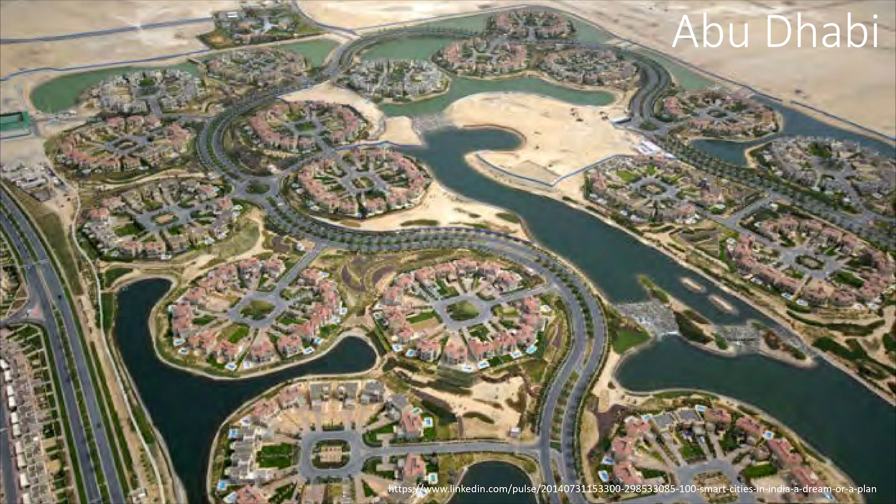Recently we use many keywords and terminologies, and it's very complicated sometimes, but I think of it like this. We used to use sustainability, green, low carbon, zero emission, security, or something like that - this is a vision for the city. So we call it eco city, low carbon city, or something like that. But if you look at the form of urban areas, it looks like a TOD, just as An Sensei mentioned.

Recently our government promotes the idea of compact plus network - a compact city. The difference with ancient cities is the technologies. Now we have many new technologies: smart grid, VR, AI, ICT. Based on those technologies we have MaaS, and also EV cars for transport. I'm in the transportation system field, so we have those transportation systems put into the form of the compact city - it becomes the smart city. So I understand it like this: we have a vision, a form, and these technologies.

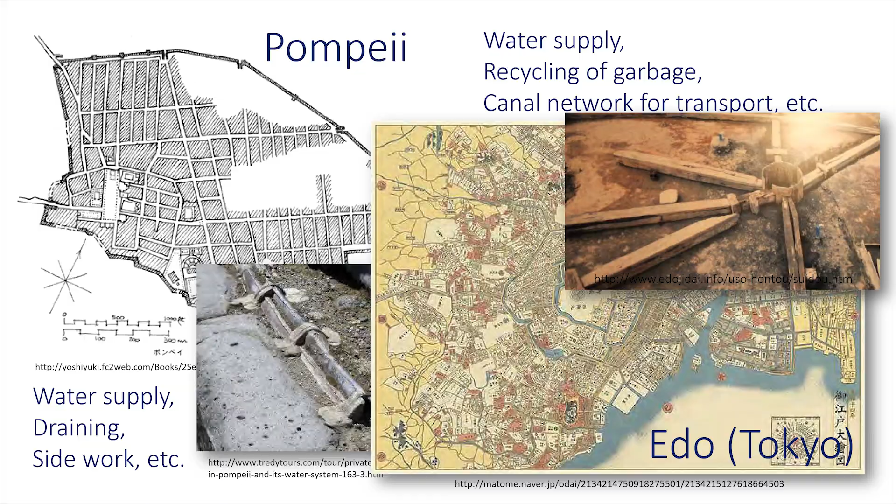Recently we also have to deal with COVID-19, as Sensei mentioned. And we have a global target. About TOD, as you already know, Peter Calthorpe in California proposed these ideas. Recently Robert Cervero, always talks about this - he sometimes comes to Thailand too.

Basically, based on rail transport near the railway station, Peter Calthorpe said from 400 meters to 800 meters radius we should have the areas - we can have a fancy life by walking.

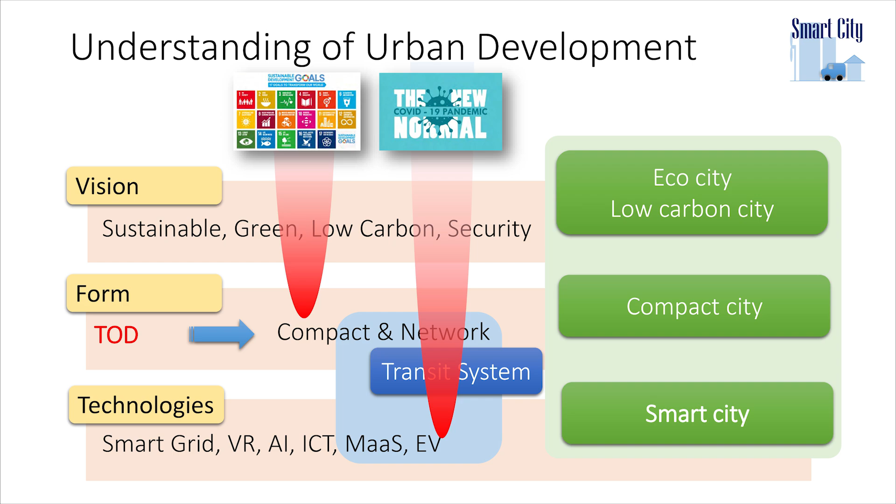In Japan, I very respect our senior, for example Mr. Ichizo Kobayashi, who brought this idea already in 1910. He started to develop the area together with a railway system. Now it's become the big railway company, the Hankyu, and he proposed many ideas. Some say he got this idea from the Garden City concept proposed by Howard.

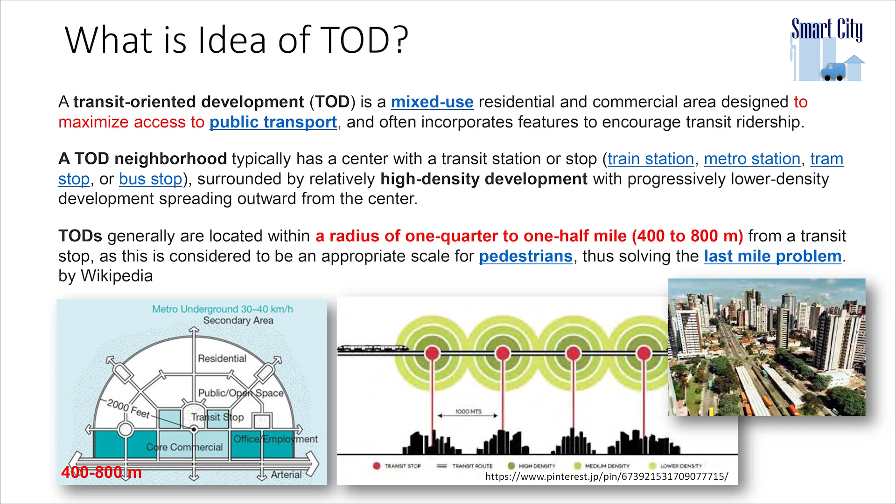From 1910 to 1960, more than 300 residential areas in Japan were developed based on this kind of area development together with the railway system - that is urban development in Japan. This is a very simple concept.

We have a CBD, and then the areas expand because many, many local people migrate from the countryside to Tokyo, Osaka, Nagoya a lot. So they need houses to live in, so we have to expand the city.

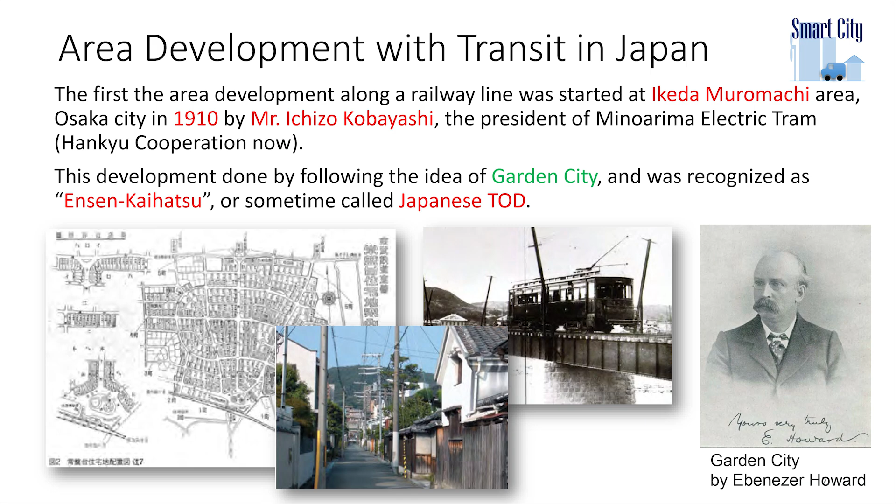Kanegai-sensei already explained what happened in Japan. Anyway, many railway companies developed along their own railway lines. The important point is that this development was made together with railway development. So by this, railway companies can get the benefit from the railway development.

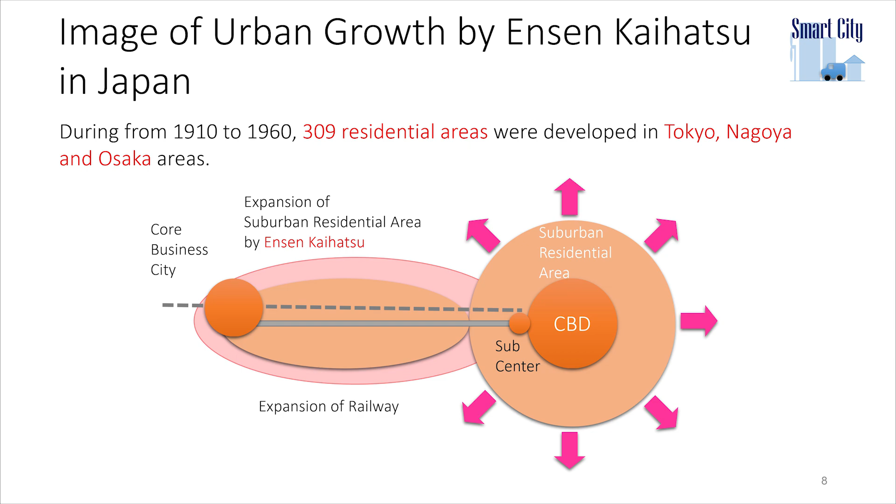If a railway company just develops the railway, they cannot get much profit from the ticket - not enough revenue. But their impact is huge. Once a railway starts to operate, that area develops a lot, so most of the benefit goes outside the railway business. So the point is how to internalize such external effects into the business.

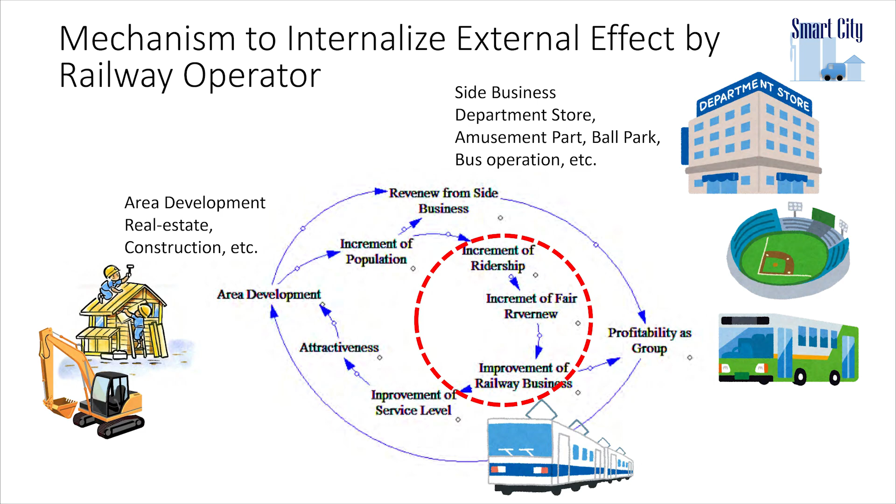Even JR East, which used to be the national railway and is now privatized, gets 30% of its revenue from non-railway business - they have hotels, some development in station areas, and get a lot of revenue. Look at the private railway companies too.

So they get almost 70% come from not railway business, other business.

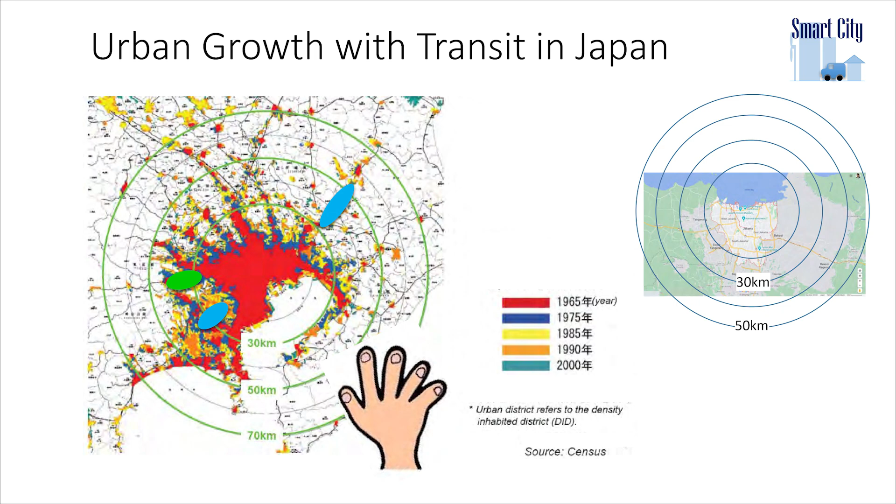That is very important. So look at the urban growth in Tokyo, for example. You can see it looks like a finger. Compare with Bangkok. In the case of Tokyo, almost new

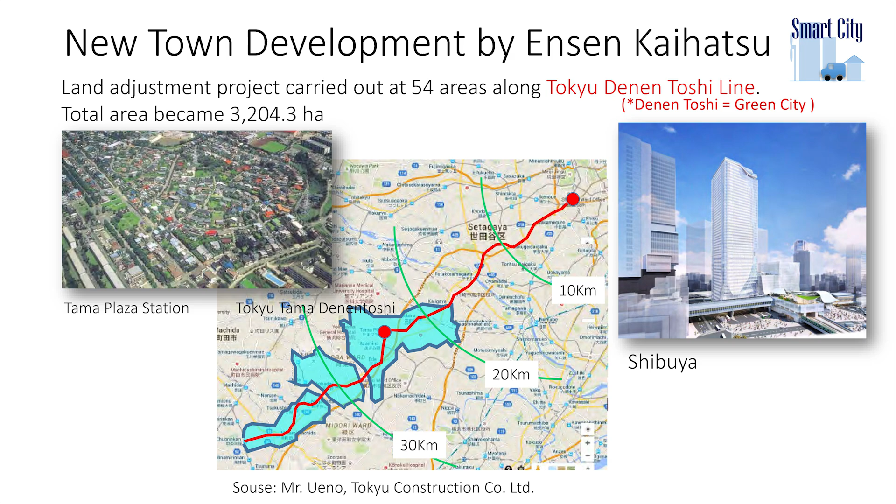urban area, and residential area, over the 30-kilometer diameter up to around 50-kilometer diameter. Compare with Thailand, now we're discussing MAP2, but most of the urban railway line within the 20-kilometer diameter, only the center part of Tokyo. It looks like near the Yamanote line, right? So in Japan, we talk about over the 30 kilometer up to the 50 kilometer.

So look at, there are many private railway companies in Japan. Each line operated by a different private firm, and then they get profit by this. So let me introduce some examples.

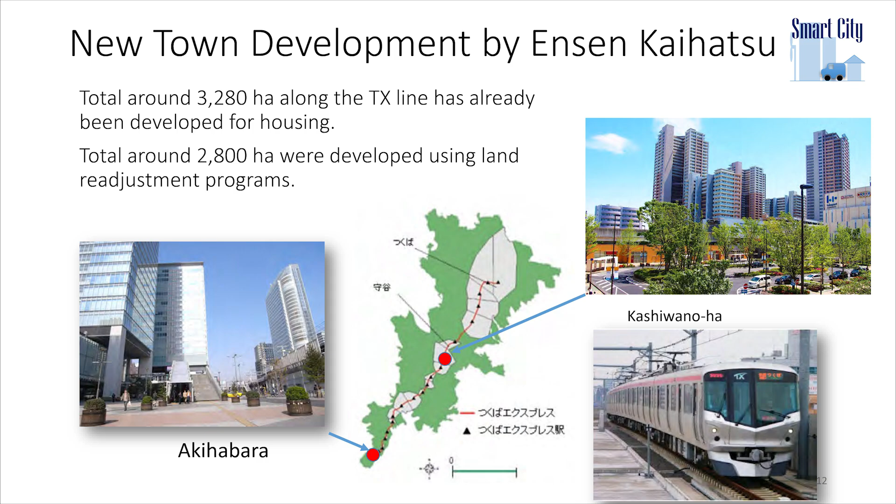If you have experience visiting Tokyo, maybe you take the subway. That is only within the CBD area. The outside is operated by private railway companies. For example, in Tokyo, the line bound from Shibuya, that you like, to the Hakone area, right? So maybe you have experienced this sometime.

And when they start to build a Tokyu railway line, there is no residential area along the railway. So actually, they have the 54 land readjustment project. Actually, this system is already established in Thailand also, right?

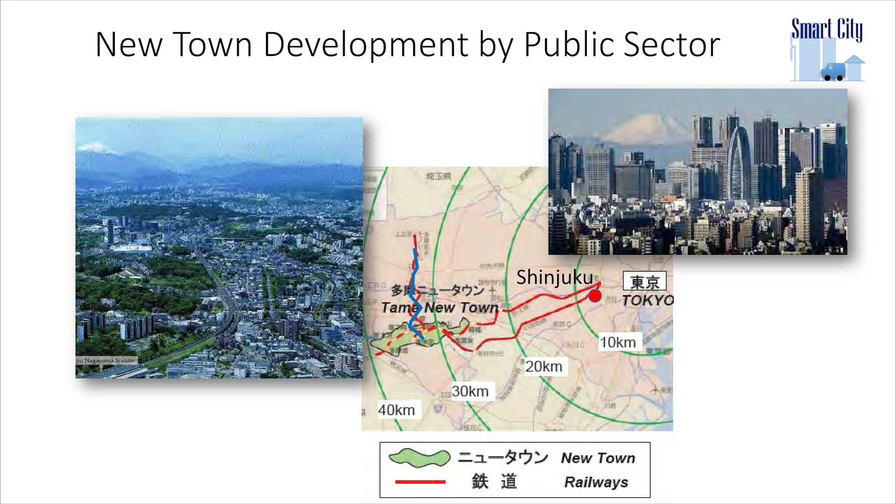So Tokyu cannot buy all the land. So they buy the land a little bit, and they established the 54 land readjustment union. So Tokyu becomes one of the members of the union. So they can lead other landowners, then they start to develop.

And when they start to develop, they didn't decide where the railway line is. So after they start to develop the area, they decided where is better for the railway line. More than 3,000 hectares was developed this way. So now here is a very famous residential area, and very expensive.

And this is the newest one, from Akihabara. You also know very well, Akihabara to Tsukuba. This area also applied the land readjustment project, and 2,800 hectares was developed by this.

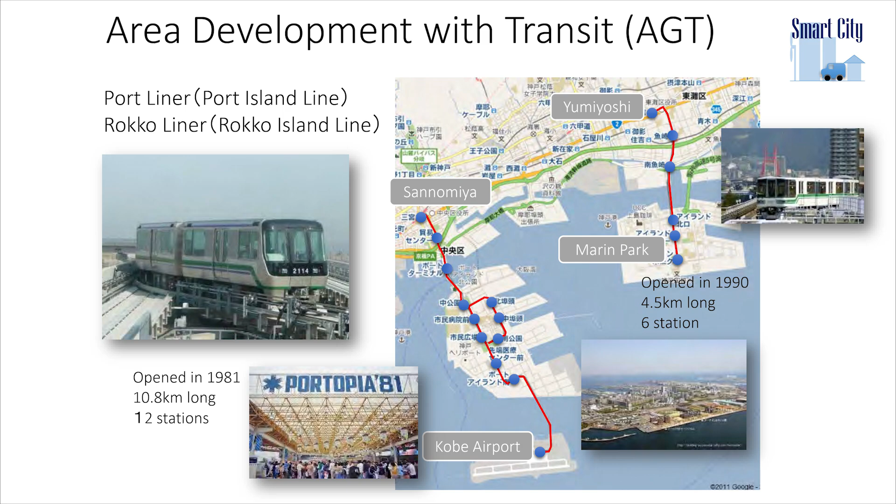So this is the newest one, but still we have this system, and of course by the train fare, we cannot return all the deficit, so we have to get some kind of benefit from area development for the railway business.

But I would like to tell you, sometimes government also developed the area, not only railway companies. In the case of Tama New Town and Chiba New Town, they were developed by government. But in this case, private railway companies cannot internalize the external effect.

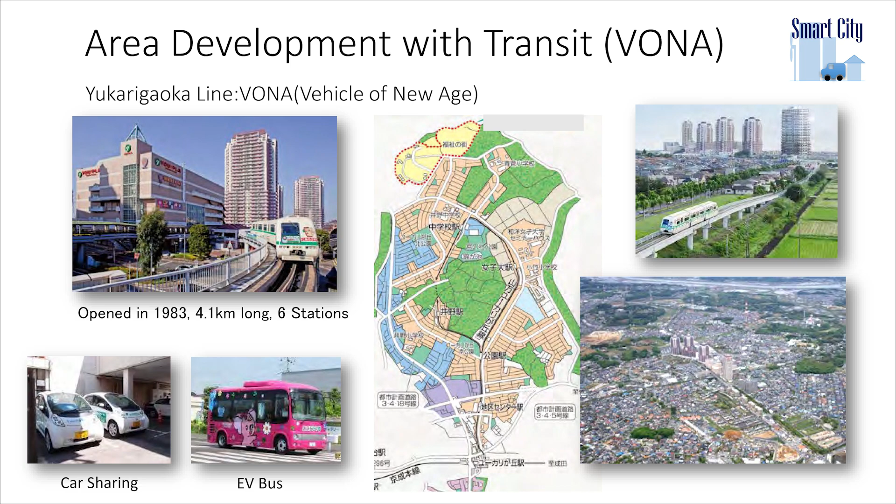So for that reason, our government prepares some subsidies. So if a private railway company comes and operates railways, the government shares some cost for them. For example, 50% of the construction cost was covered by government.

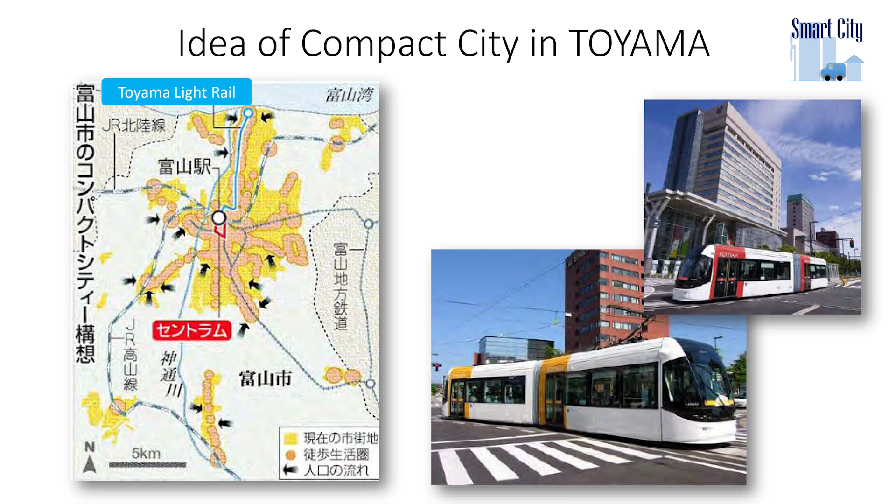And also we have a very small size of this kind of development. If you have Kobe, you can see there is a man-made island. This is the reclaimed area. They are very smart, Kobe city is very smart. They get soil from the mountain, and they develop that area and bring the soil by like a tube, and they have this island. Now they have an airport also.

And for these islands, they have guideway transit systems like this. Or some private developers also develop by themselves.

This is close to Narita airport, named Yukarigaoka. The company named Yamaman developed this small transit system by themselves. They pay for everything, they didn't get any fund from government. They operate by themselves and develop these areas.

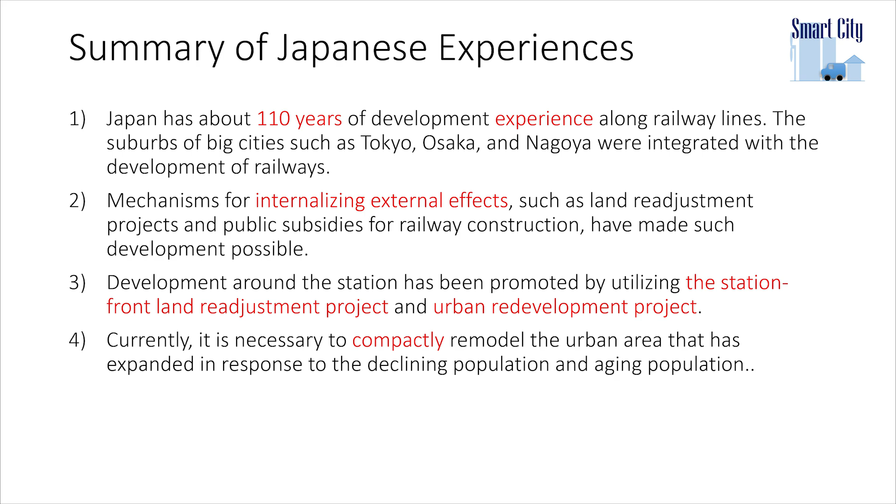And so now, you know that in Japan, the population is decreasing a lot. Some statistics say that by year 2050, our population will become half. So that is a big problem for us. So how to make the city area compact is the main issue.

So some cities already started, like Toyama, they renewed the tram to the new type of LRV. Then they ask people to stay near the tram line. So make the city compact. Government provided some support.

Oh, I forgot. So, yeah, anyway, I don't have much time.

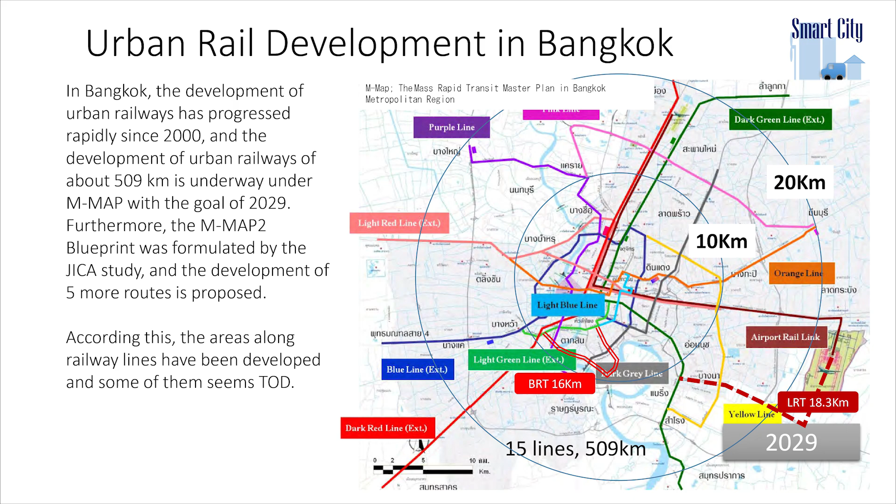We have a long history, and luckily, when we started to develop the area, we could introduce the railway system simultaneously with area development. So we don't have an auto-dependent city, but mainly a rail-dependent city for Japanese people. The station is very important for Japanese people. The station is the center of our life.

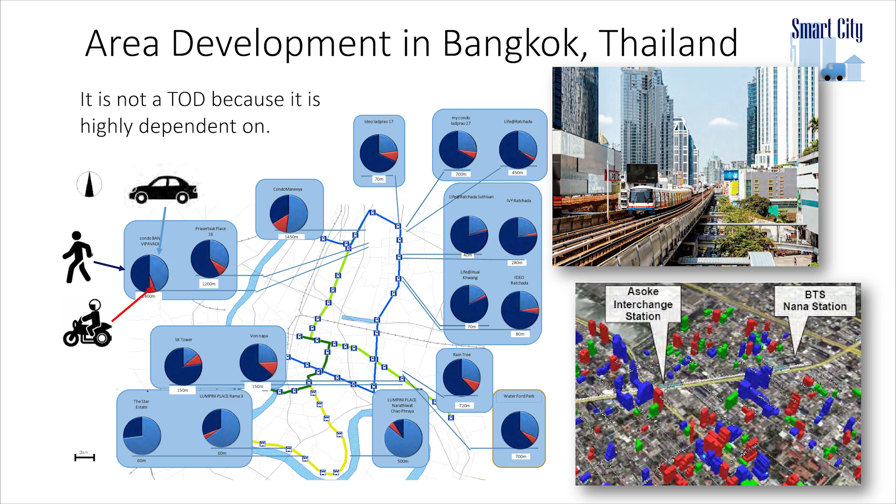Look at Bangkok. This is an M map. From it, by 2029, you will have a 509 kilometer network with 15 lines. But you should realize how many stations you will have once all railway lines open. By year 2000, you had zero railway stations for urban railway in Bangkok. But after completing the whole network, you will have 330 stations in Bangkok. You should realize this problem.

So we think you can develop the area together with the railway. Many people say Bangkok is a good example of TOD. I always say no, because I studied with Professor Fumihiko Nakamura about this.

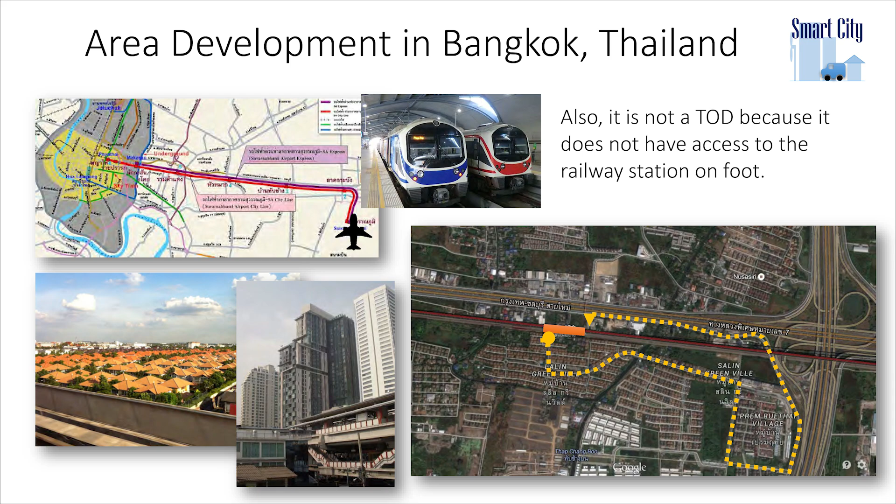We sent students to count how many people come out from condominiums near the railway stations. Even in condominiums, whatever room, whatever condominium, there are many parking spaces. During the daytime they're empty. So many people, even just 5 minutes from the railway station, everybody drives the car. That's a problem.

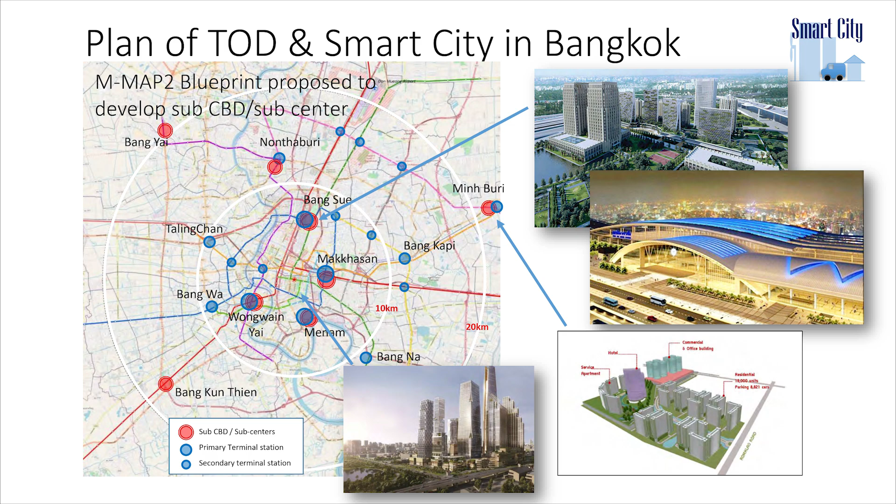Actually, we also have a condominium near here, just 5 minutes from Lat Phrao station. But my wife drives the car every day. I said, let's take the railway, the subway, MRT. But my wife said, why? So it's a very difficult problem.

Please realize, even though there are many condominiums near the railway station inside Bangkok, the problem is that people don't rely on the railway. That's very, very strange.

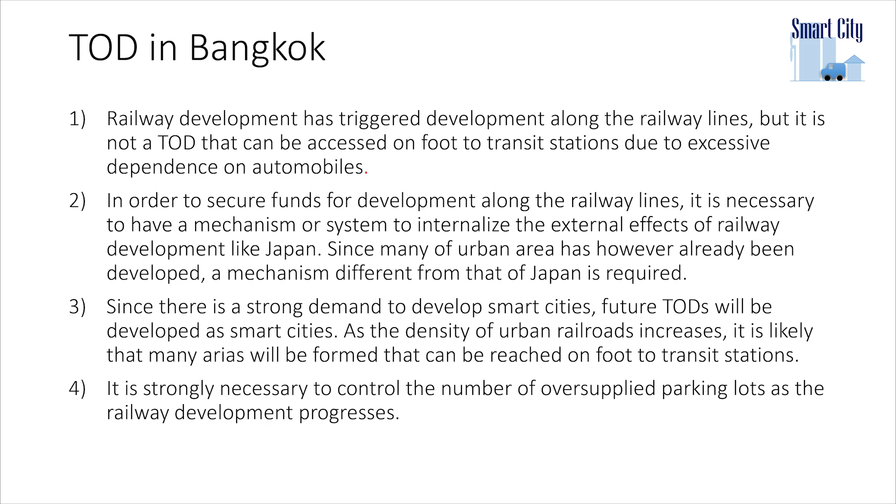One time, my friend, I won't mention the name, bought a condominium near a railway station. I asked him, why did you buy the condominium? Do you use the train? No, I just use the parking, because there's no parking near the station. He had a flat house, so he drives the car to the station, parks, and comes to downtown.

Also, the problem is, as Ansen mentioned, accessibility. That is a big problem. It's one example near the airport, along the airport rail link. The houses here have no access to the railway station. We cannot believe this for Japanese people. For Japanese, in front of the railway station is the most valuable land. But in Thailand, you cannot access it, so these people have to go around to come to the railway station.

It's very strange. If you look at the scene from the railway, there are many houses, so foreign people misunderstand - they think there is a railway, so people buy houses near it. No, actually they use the highway, relying on the highway, not the railway.

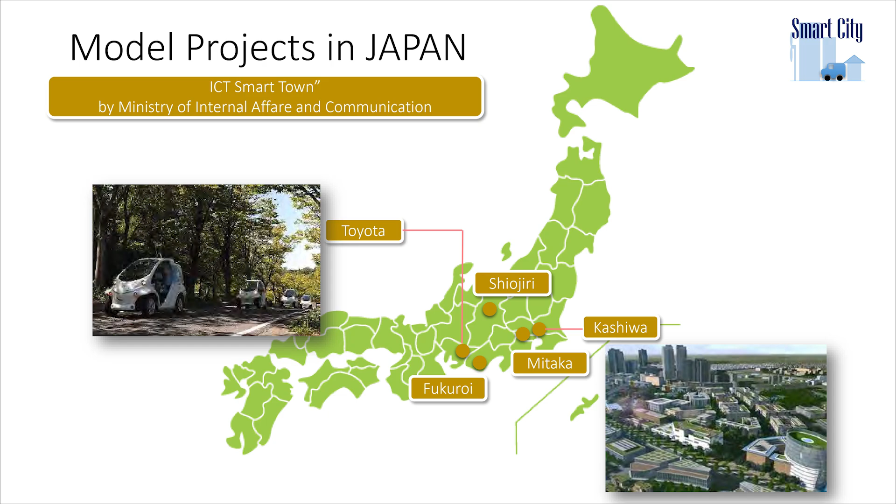I said in Japan, we developed the area together with the railway. But not only Bangkok - also maybe Jakarta, Manila, and Hanoi, Ho Chi Minh - those cities already developed based on automobiles. So there's no going back much like Japan. So how do we internalize the external effect?

And in Thailand, another problem is that under your law, the railway company cannot develop the area. They have no right to develop. That is a big problem.

So anyway, under the M-MAP2, that is the revision of the master plan for the urban railway system. We propose many ideas. You have to think about where the sub-centers or transition terminals should be, and then consider how to develop that area. This is very important.

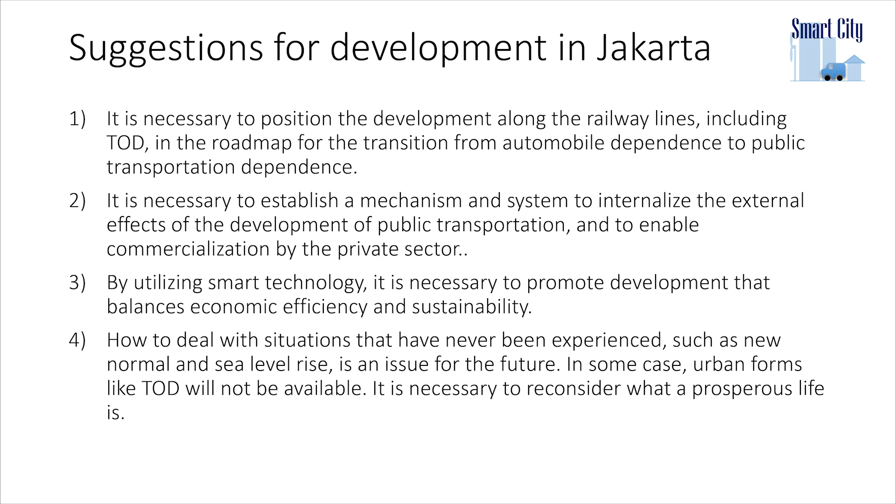I know many staff at MRT, for example, study like this. They would like to do that. I know there are many reports, I also collect many reports. They propose, but I don't know. They said that when they submit to the board meeting or legal office, it's always rejected. So they cannot solve this problem. But now you have to consider it.

Anyway, depending on automobiles is a problem. So now the time has come to turn Bangkok from an auto-dependent city to a public transport-dependent city. So how to do that? That's the most difficult part, because you cannot internalize the external effect, and also there's the regulation. So it's very difficult to do that, but now the time has come to consider this.

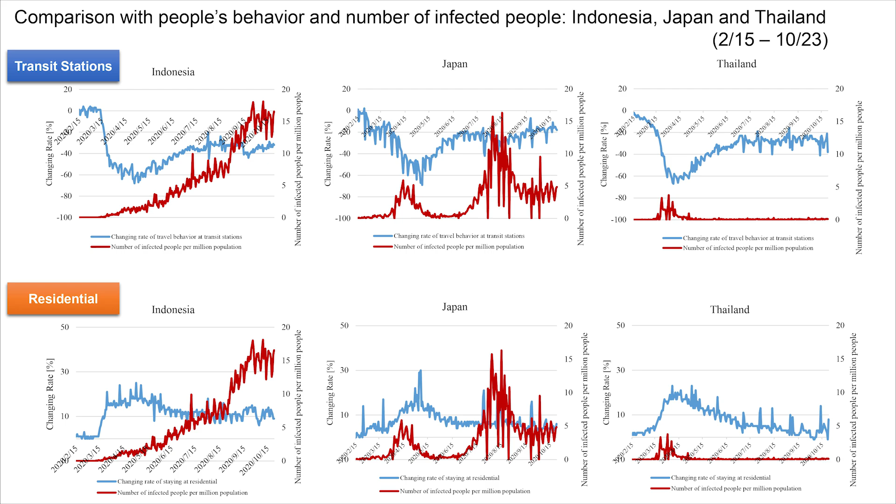One of the issues is parking. Too many parkings in Bangkok. We have a regulation in Japan also, and compared with Bangkok and Tokyo, the regulation in Bangkok is 2 times that of Tokyo. So if a condominium provides a lot of parking, and each commercial building or condominium provides so many parkings, how can you stop people from driving cars? Very difficult, right?

In Tokyo now, many developers ask local government to reduce the parking regulation, because maybe 30-40% of the parking provided under the regulation goes unused. So developers would like to reduce it. In Tokyo, most people use public transport, so they will not drive the car, so there's no necessity to provide the parking.

Maybe it's the time for Bangkok to discuss about the parking, how to provide the parking.

And the smart city, we have many ideas, but actually we don't have a new development like Iskandar or Dubai. We basically discuss about retrofit, how to transform the existing city into a smart city. It's not so easy, actually, because the question is: who will pay the cost to transform our city to the smart city? We need a big budget, and we don't know how to pay for that budget.

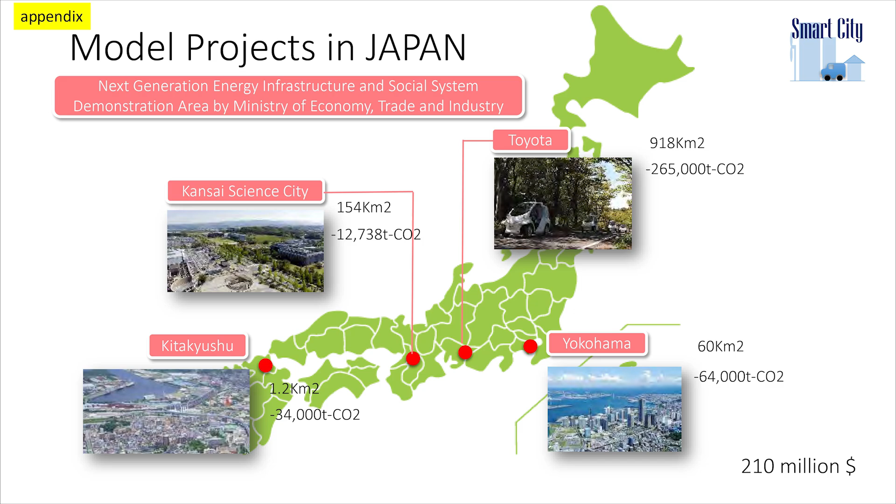And another problem, as Sensei also mentioned, is the 15-minute city concept. We already discussed this in the case of Chiba City, which my staff calculated. Of course, we just consider the compact city plus network. In Chiba City there is an urban monorail, so along the monorail we can make the city compact.

But the problem is that if you ask people living near the monorail to move their house, so who will pay for that?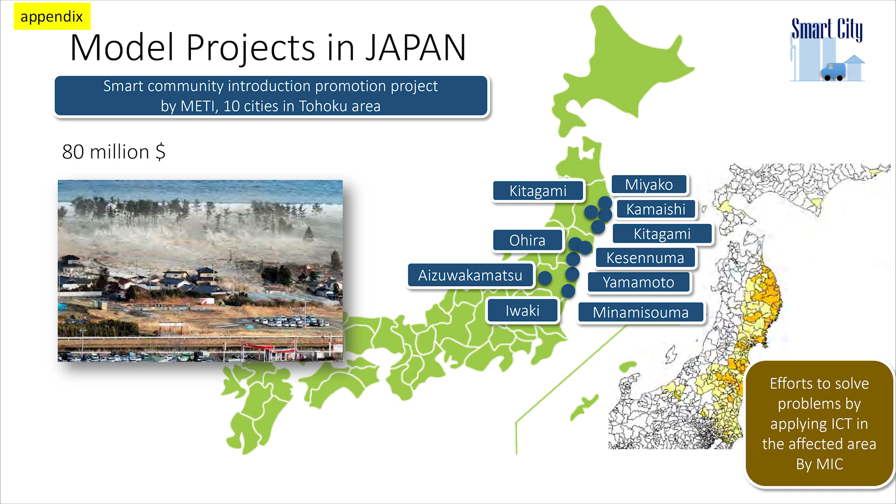So another idea is the 15-minute city, or X-minute city. I don't know if 15 is okay, or 10 minutes, or 20 minutes, but anyway the 15-minute city idea is also very important. This will help a little bit. According to our calculation, I think the 15-minute city is much more applicable for our society.

And our big question at the moment is: of course compact city is okay if it becomes compact, it's very effective, no emissions, no energy consumption. Okay, but during the transition to the compact city, how do we do it?

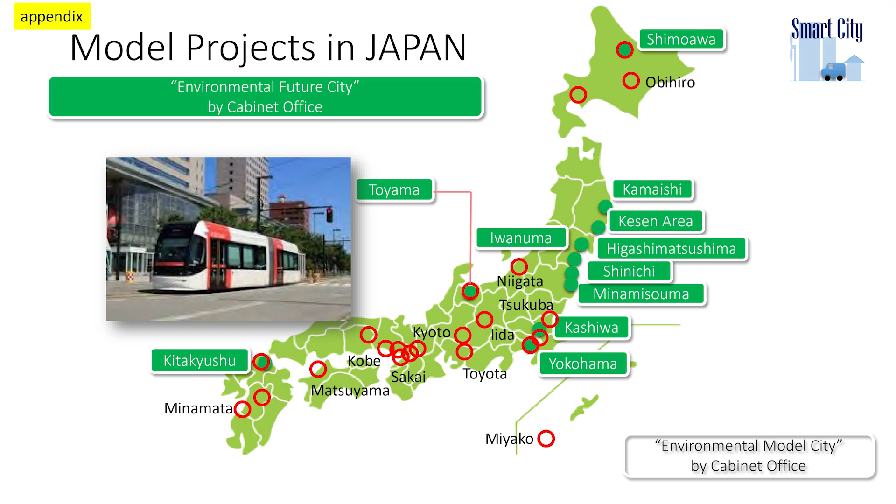We are very worried about this. If we hurry to make it compact, we need a huge budget. If we wait to become compact naturally, maybe it takes a long time. How do we manage during that time? Because we have to demolish some public facilities, schools, hospitals, to make it compact. We need the money, even for demolishing, right?

But still people stay, the densities become very low, so it's not effective for all facilities. That's a problem. So now our group is discussing about this.

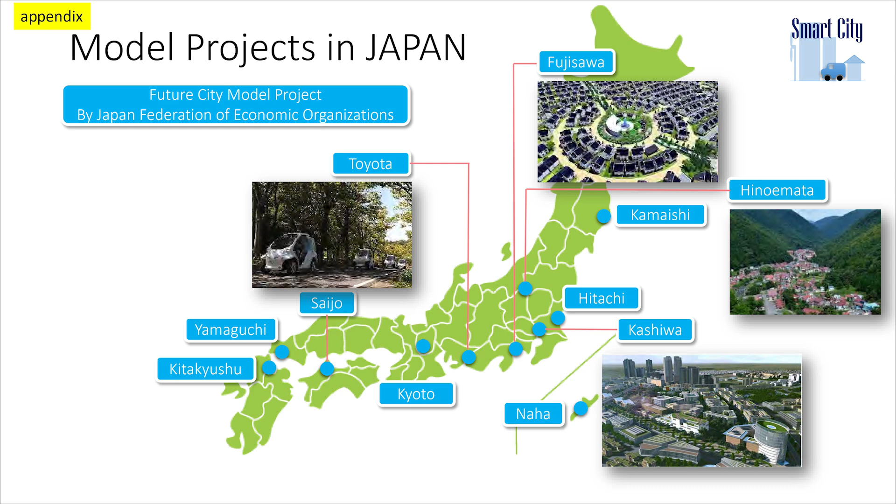So as a suggestion, I don't know if it's a suggestion or not, but let me read it. It is necessary to position development along the railway lines, including TOD, in the roadmap for the transition from automobile-dependent to public-transport-dependent. Second, it is necessary to establish mechanisms and systems to internalize the external effects of public transportation development and to enable commercialization by the private sector. That's important. Third, by utilizing smart technology, it is necessary to promote development that balances economic efficiency and sustainability.

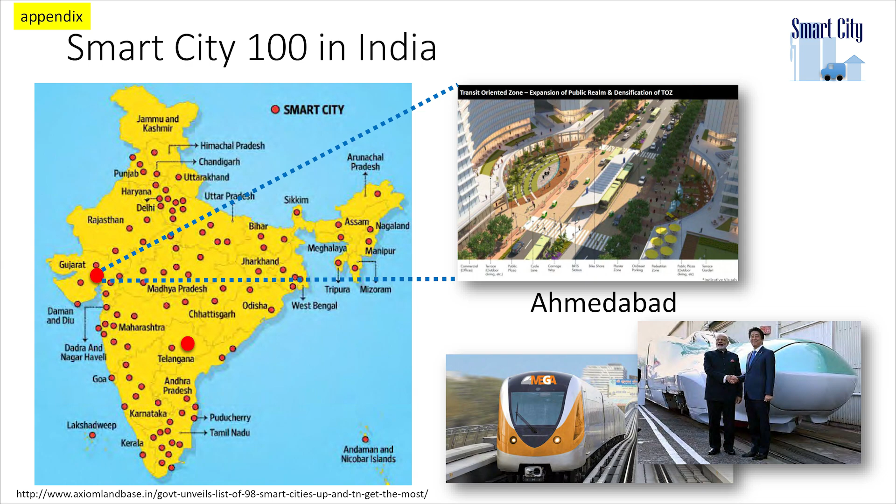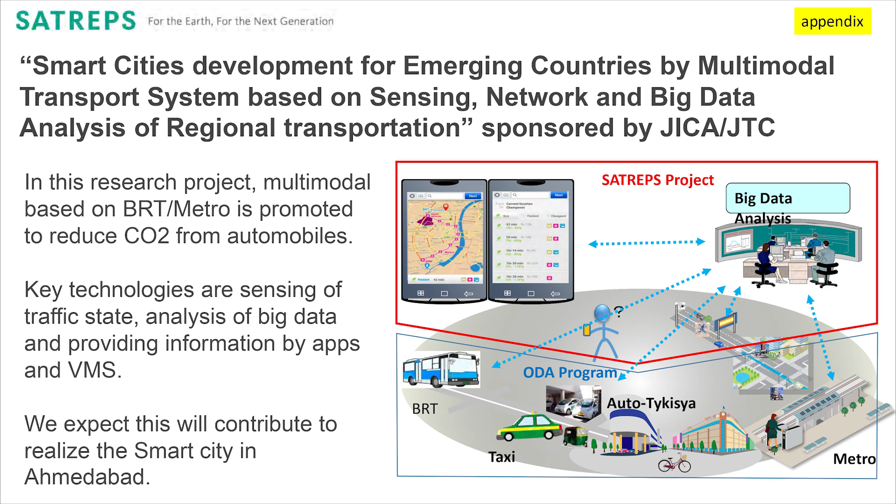And lastly, how to deal with situations that have never been experienced, such as the new normal, sea level rising, or urban flooding, and many other things, is an issue for the future. In some cases, urban forms like TOD would not be able to apply, so it is necessary to reconsider what the purpose of life is.